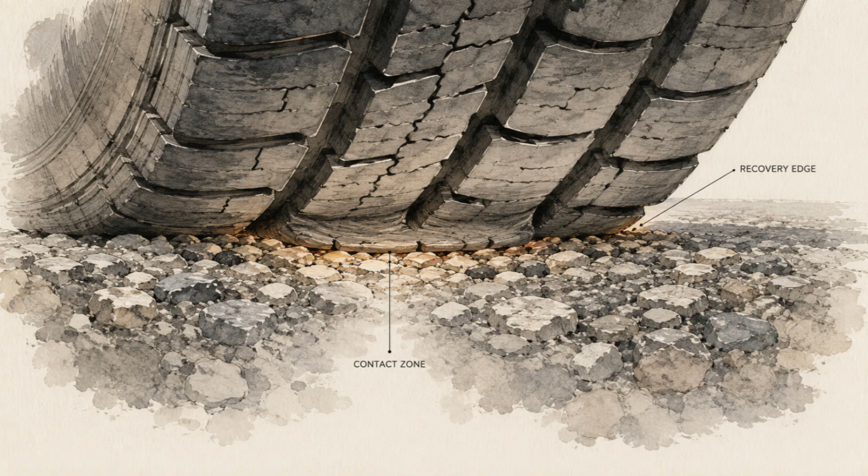A car slows for a pedestrian at a crosswalk. Beneath it, four patches of tire meet the road, together not much larger than a few open hands. In that brief stop, each patch must flatten, grip, warm, and recover before the wheel turns again.

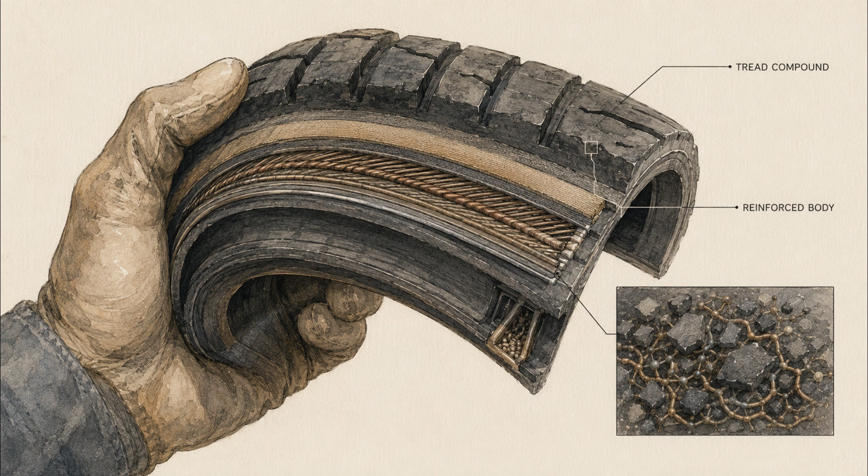The black surface looks solid and simple. It is neither. A tread block contains long molecules, reinforcing particles, protective chemicals, and carefully controlled links. Beneath it sit other rubber compounds, steel, textile, and trapped air. Each part carries a different piece of the same demand.

Rubber became civilization scale only when that recoverable material joined air, reinforcement, factories, roads, labor, and rules. The tire did not create modern mobility alone, but without a reliable place for machine and road to meet, speed, freight, and everyday travel would take a very different form.

That makes the contact patch personal. It shapes how your vehicle stops. Its condition depends on pressure, age, heat, and maintenance.

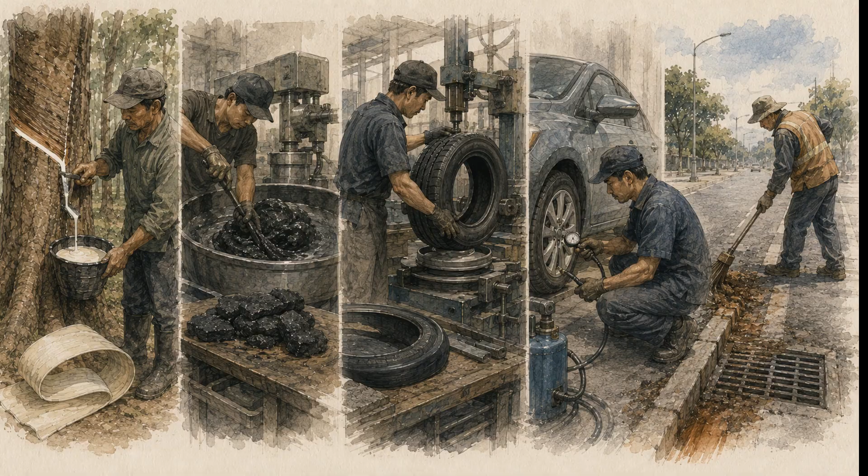People tap the latex, mix the compounds, build the tire, repair the road, and manage what wears away. Every trip depends on their work, and every trip leaves some material behind.

Rubber did not enter history as a European invention. Indigenous societies in the Americas had already collected latex and shaped elastic, water-resistant objects. They understood a living material drawn from plants long before European manufacturers tried to force it into shoes, cloth, hoses, and factory goods. The raw substance was remarkable.

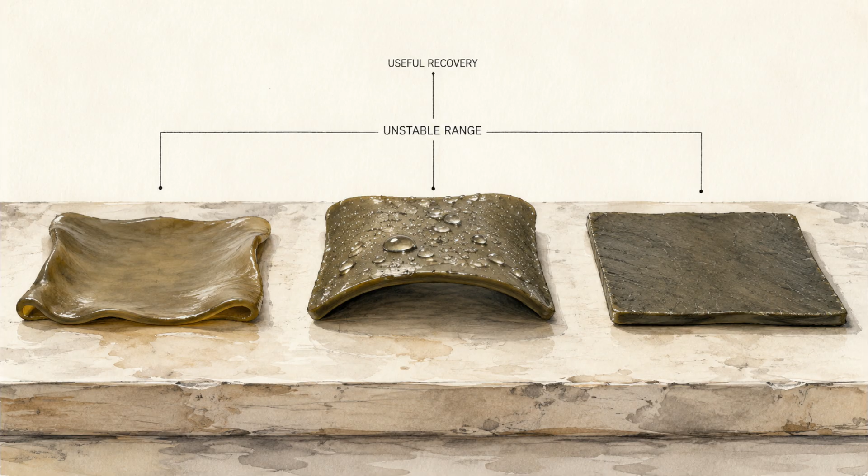Pull it, and it could stretch. Release it, and much of its shape returned. It resisted water. It could join flexible surfaces that leather, wood, and metal could not replace. Yet its behavior changed with heat, cold, time, and handling.

Early rubber goods could become sticky in warm weather. In cold conditions, they could stiffen. A useful shape might creep or distort. Manufacturers saw enormous promise, followed by spoiled products and angry customers. Elasticity was already there. Dependability was not.

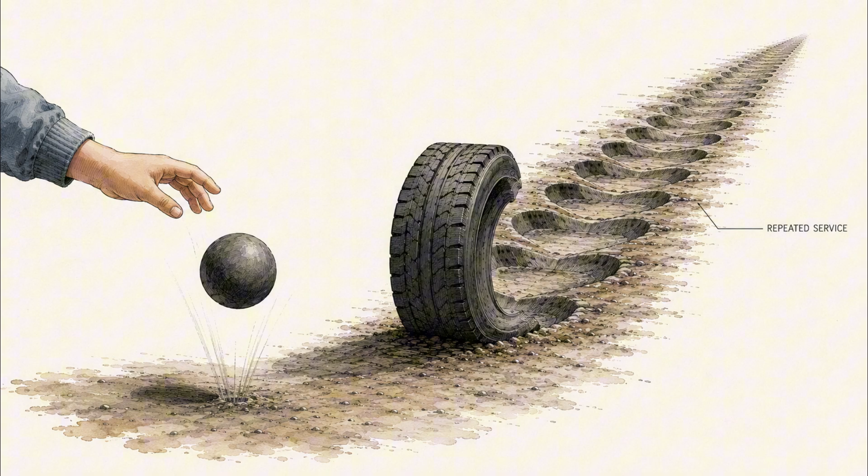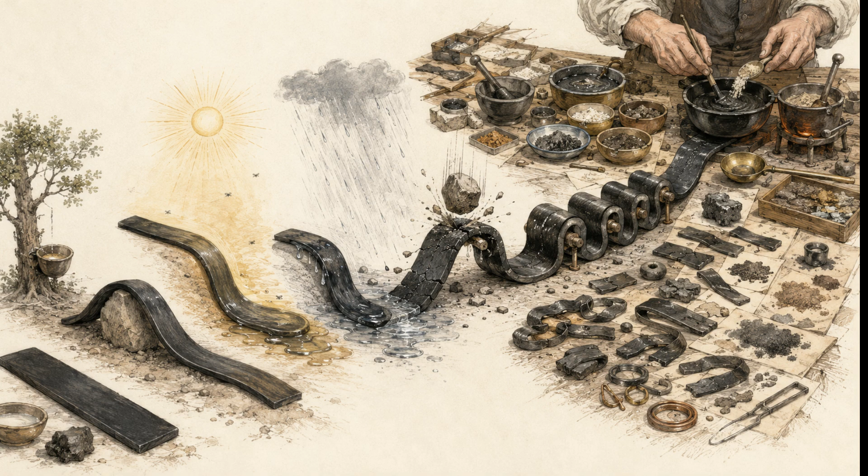That difference matters. A rubber ball can be a curiosity, while a tire must repeat the same demanding action for thousands of kilometers. It must bend without staying bent. It must hold together while warm. It must survive oxygen, sunlight, water, impacts, and constant flexing.

19th century experimenters spent years mixing rubber with powders, solvents, metals, heat, and sulfur. Charles Goodyear became the best-known name in the United States. Thomas Hancock developed and patented related work in Britain. The familiar story of one lucky accident hides a longer, contested process of experimentation.

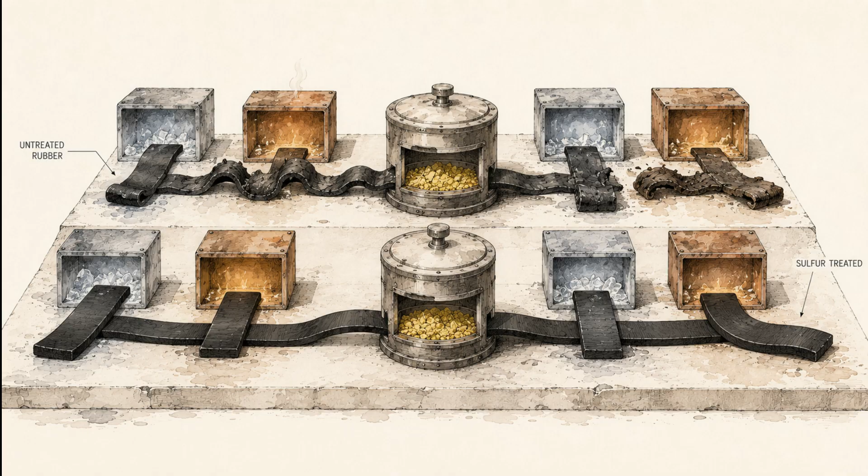Controlled heating with sulfur changed the industrial future of rubber. The treatment made useful properties more stable across a wider range of conditions. It did not create a perfect substance. It created a material that engineers could begin to formulate, shape, test, and reproduce.

Then another idea changed the job rubber was asked to do. Instead of placing a hard band around a wheel, designers enclosed air inside a flexible structure. By the 1890s, pneumatic bicycle tires were making rides smoother and faster. Cyclists wanted better roads, and the new tires soon moved from bicycles to automobiles.

The air carried load, but air alone was useless. It needed a flexible container that could survive bending and stay attached to the wheel. Rubber had become stable enough to serve that system. The next challenge was making it strong, consistent, and durable enough for machines moving farther and faster.

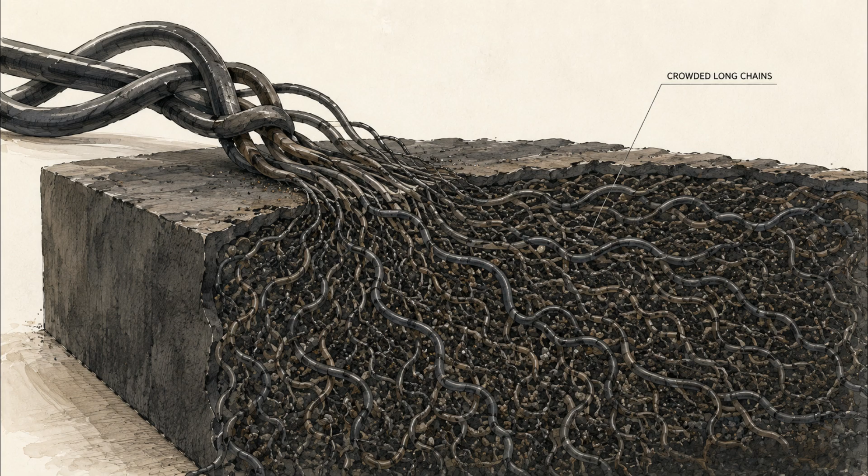To understand that change, imagine a bowl of very long, cooked noodles. They twist around one another, and they can change shape in countless ways. Natural rubber begins with a similarly tangled population of long molecules, although the real network is far smaller and more crowded. Polyisoprene is the long chain molecule that makes up most natural rubber.

When the material stretches, many chain sections become more aligned. When the force disappears, thermal motion helps the chains return toward a larger range of tangled arrangements. That is the basic source of rubber's spring-like recovery.

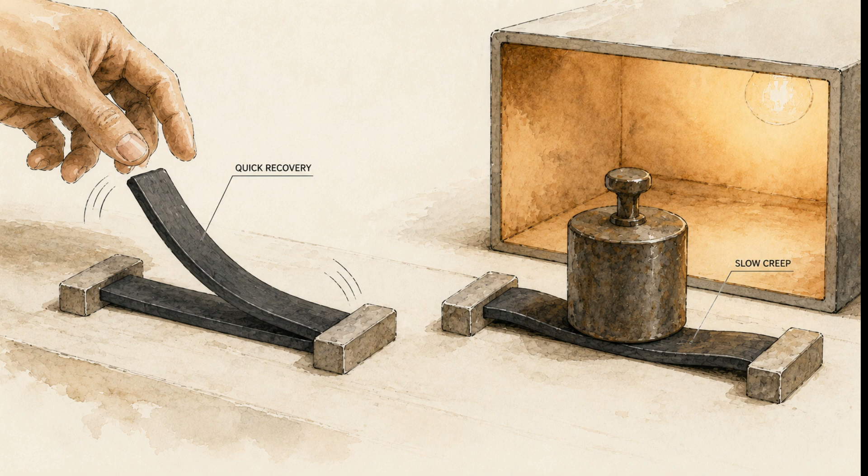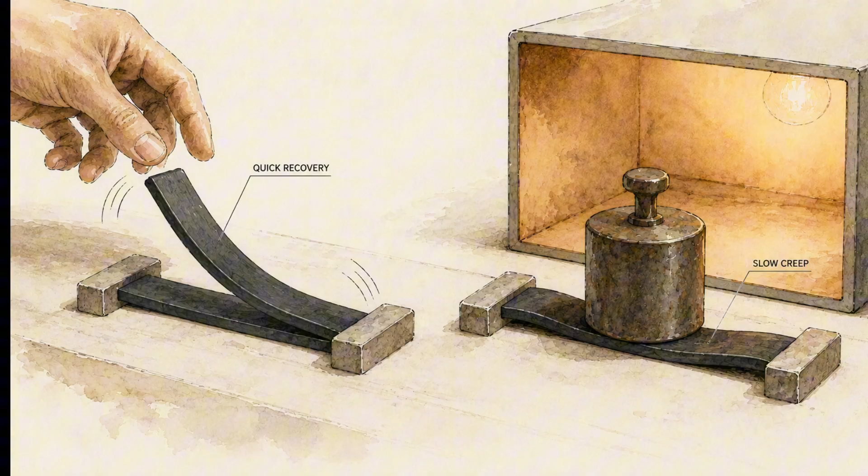But loose chains can slowly move past one another. Given heat, force, and time, the material can flow or keep part of a new shape. A useful tire compound needs the chains to move locally without escaping the whole network.

A crosslink is a connection that keeps neighboring chains in one network. Sulfur-based curing creates many such connections. They are not identical staples placed at even intervals.

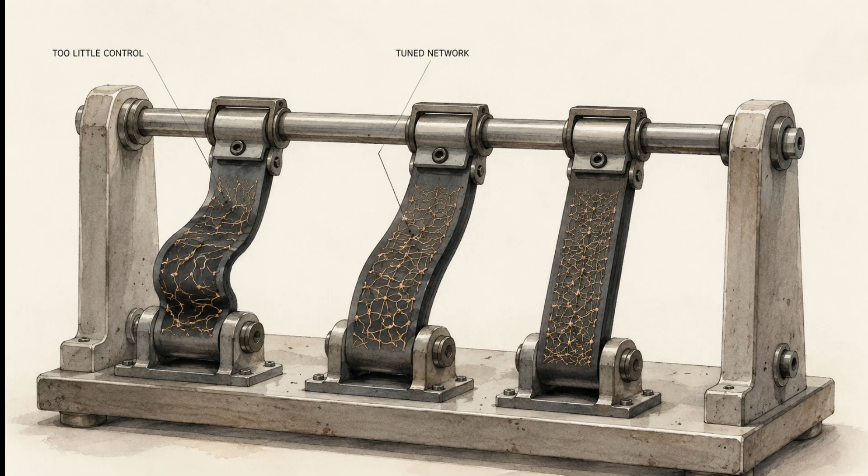Real networks contain several link structures, loops, loose ends, entanglements, and regions shaped by mixing and cure history. With too little control, the material can remain weak or unstable. Change the network, and stiffness, heat resistance, fatigue, and aging also change. Tire makers are not seeking the largest possible number of links.

They are tuning how far different compounds can move and how reliably they return. Natural rubber has another useful response under strong stretch, called strain-induced crystallization. It means stretched chain segments briefly form small ordered regions.

Those regions help the material resist further deformation, then largely disappear when the load is removed. This does not turn a rolling tire into solid crystal. The response depends on temperature, formulation, speed, previous loading, and the shape of damage. It helps explain why natural rubber remains valuable in demanding, fatigue-sensitive uses. It does not make cracks or poor maintenance harmless.

The polymer network is still only part of a tread compound. Fine carbon black aggregates can reinforce rubber by creating an enormous, complicated interface with the chains. They change stiffness, strength, wear, processing, and resistance to sunlight. Modern compounds may also use silica and specialized linking chemistry. There is no single ingredient that produces every desired property.

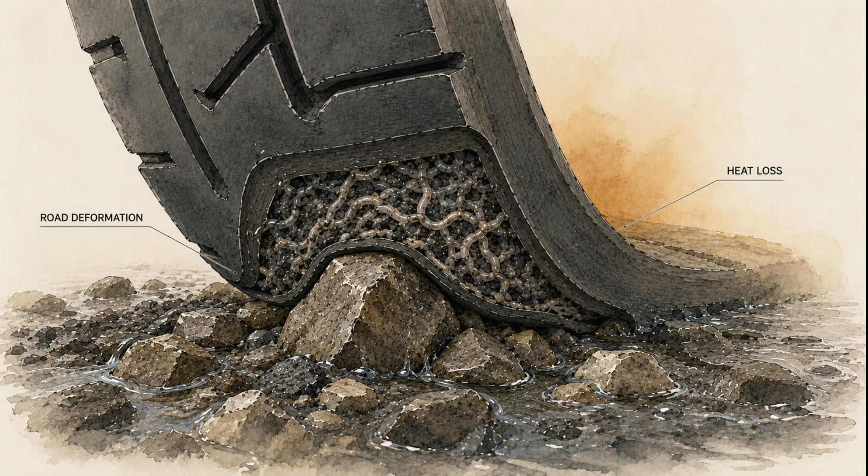Grip requires deformation at the road. That deformation also turns some motion into heat. Resistance to wear can conflict with traction under another condition. Cold, rain, load, speed, and pavement move the compromise again.

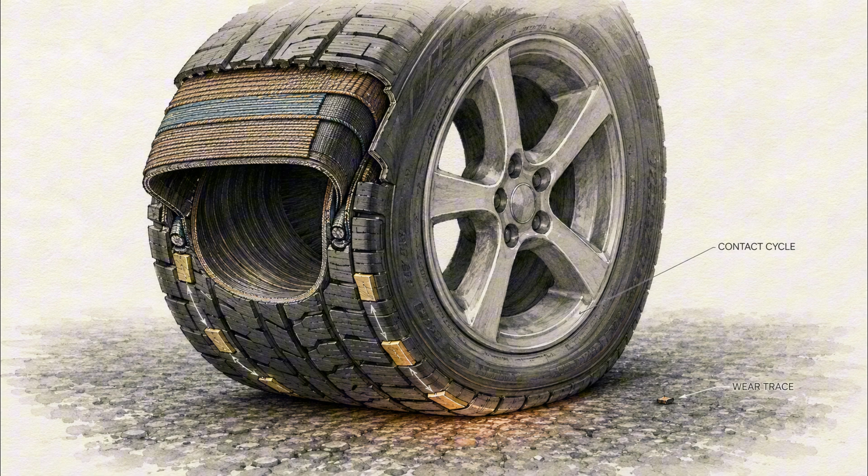So the contact patch is not a passive footprint. Tread blocks enter, bend, press against texture, and leave. The carcass changes shape around them. Some energy returns to the moving vehicle. Some becomes heat. Some material separates as wear. Recovery must begin before the same region comes around again.

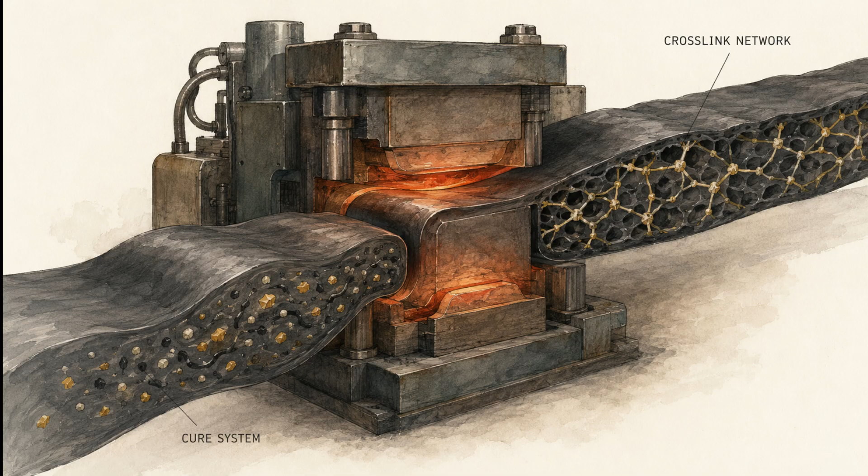The process that stabilizes rubber is called vulcanization. In simple terms, heat and a cure system builds the cross-linked network. In practice, sulfur may form different kinds of links, while accelerators and activators control how the reaction proceeds. The useful result depends on formulation, temperature, pressure, and time.

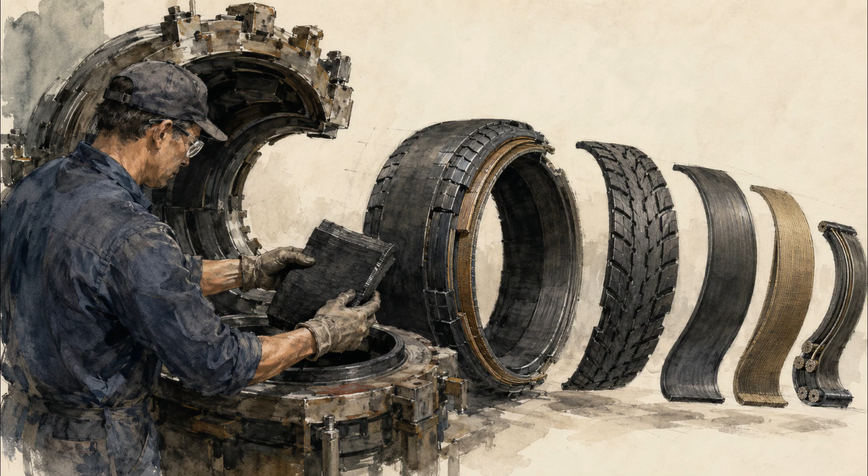Vulcanization solved one problem, then revealed many others. Pure cured rubber could not meet every demand of a modern tire. A tread needs abrasion resistance and grip. A sidewall must flex and weather. An inner liner must slow air loss. The bead must transfer force where tire meets rim.

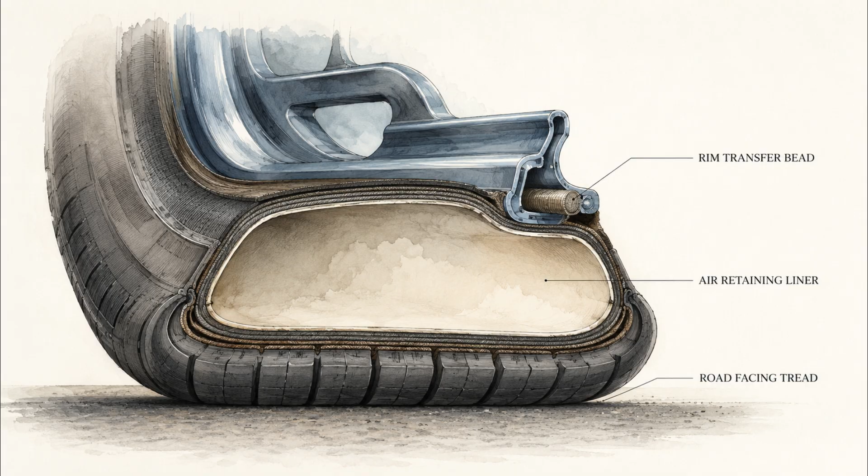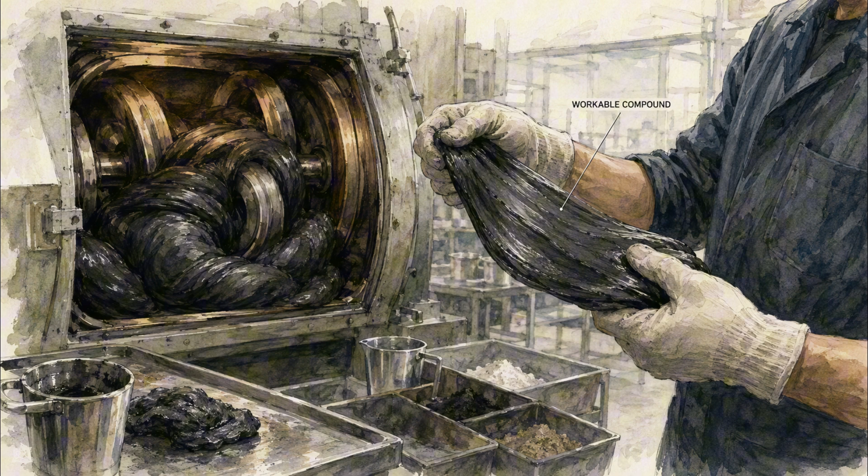That is why a tire factory does not begin with one black recipe. Workers and machines prepare separate compounds for separate jobs. Natural and synthetic rubbers may be blended. Fillers, oils, protective chemicals, and cure ingredients are mixed under carefully managed heat and mechanical force. Timing matters because the material must remain workable before final cure.

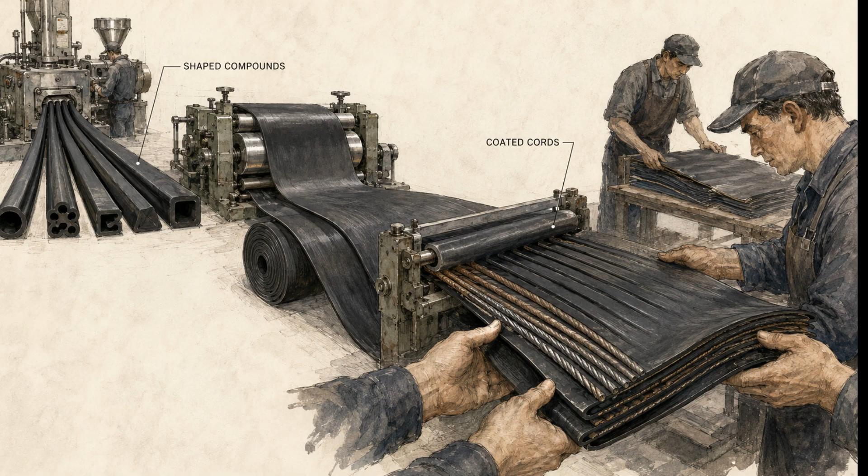Compounds are extruded or rolled into tread, sidewall, liner, and thin bonding layers. Rubber is also pressed around textile cords or steel. Each operation creates an intermediate part that another operation must place accurately.

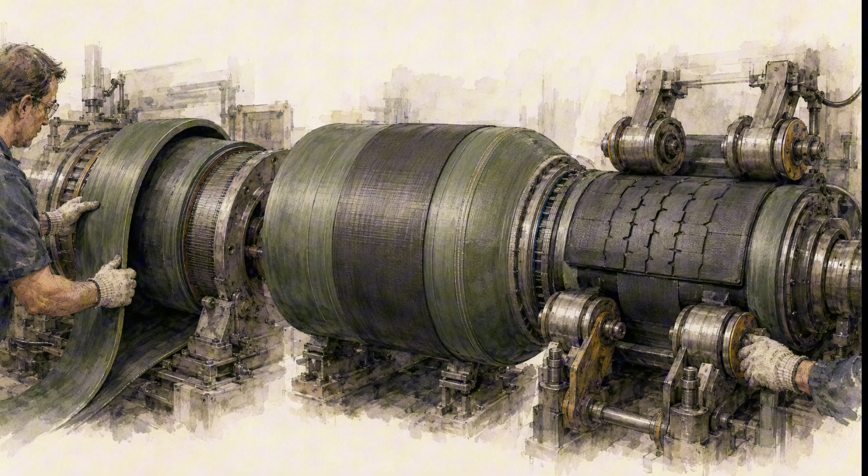On a building drum, the tire starts as an uncured assembly called a green tire. An inner liner goes down first in a common radial design. Carcass plies extend towards strong bead bundles. Sidewalls are added. Steel belts, optional cap plies, and the tread form a second assembly around the crown.

The body expands into the belt and tread. Rollers press the components together. Their uncured tack helps them stay positioned, but the structure is not finished.

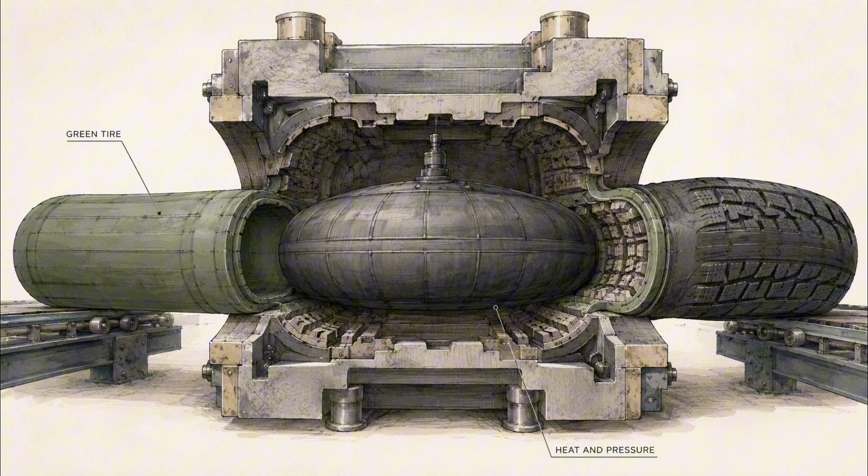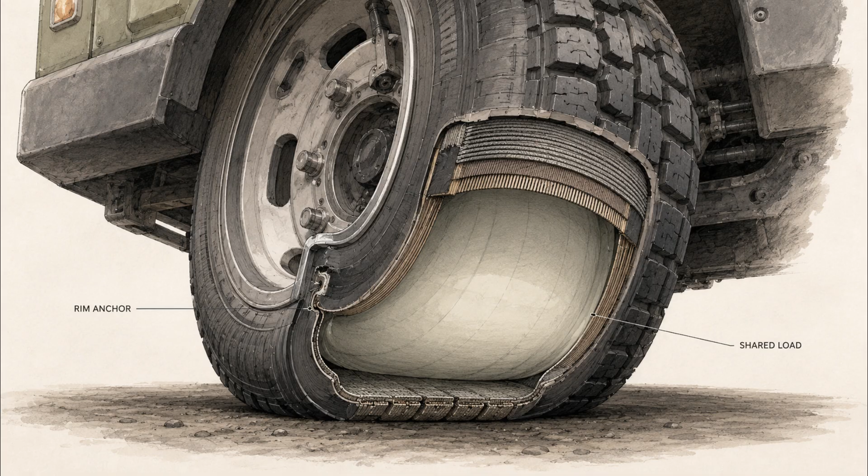A bladder then pushes the green tire into a heated mold. Pressure shapes the object while the compounds cure and bond. What leaves the mold is not a rubber ring. It is a pressure-containing composite designed to deform in controlled ways. Air pressure, carcass tension, belt geometry, beads, and several compounds share the load. The visible tread is only the road-facing edge of that system.

The historical path was just as layered. Sulfur treatment made rubber goods more dependable. Pneumatic bicycle tires showed what air and flexible material could do together. Better fillers, cords, compounds, radial structures, factory control, testing, and road design extended that performance.

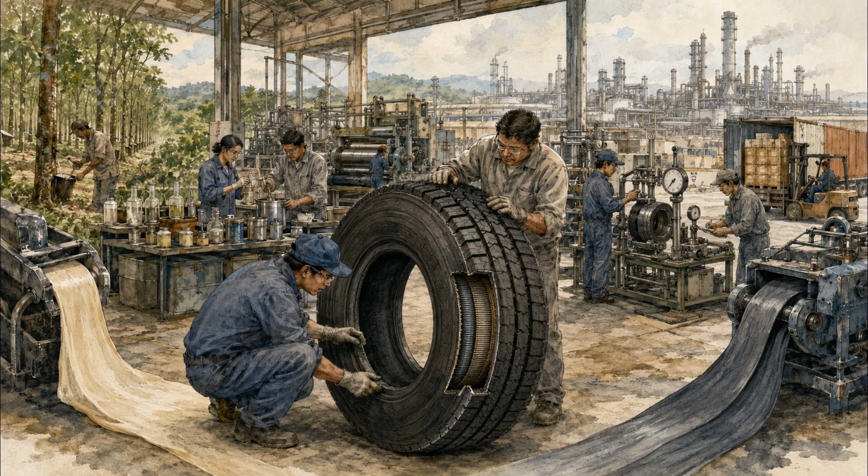No single workshop produced the modern tire in one leap. The breakthrough was the growing ability to divide conflicting jobs among materials and reunite them in one repeatable object. That required chemistry, skilled hands, machines, standards, and a supply chain reaching far beyond the factory wall.

For a cyclist on a rough 19th-century street, the change was physical. Air-filled tires softened repeated shocks and made faster travel more tolerable. Their popularity helped widen the bicycle market. Cyclists also became advocates for smoother roads, creating pressure that later motorists inherited.

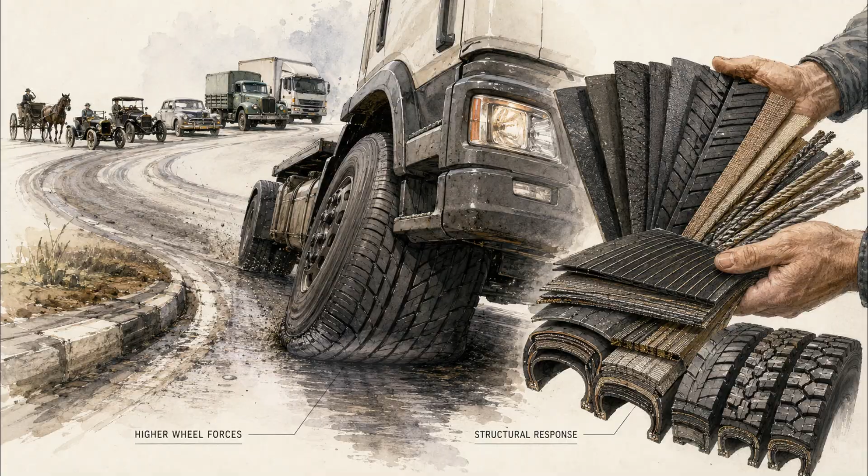Automobiles asked far more of the same basic idea. Vehicles became heavier and faster. Engines delivered more power. Brakes and steering placed new forces through the contact patch. Tire makers responded with new compounds, cords, belt structures, tread patterns, and methods for making them consistently.

Reliable tires relaxed a constraint on where machines could travel. Trucks were not tied to rails. Buses could follow changing routes. Farm machines entered fields. Emergency vehicles, construction equipment, and aircraft all depended on specialized versions of the flexible road interface.

But rubber did not build this world by itself. Steel made vehicles and reinforcement. Petroleum supplied fuel and synthetic polymers. Factories reduced cost. Credit expanded purchasing. Governments paved roads, wrote traffic rules, and chose where infrastructure would go. Maintenance networks kept vehicles moving.

As demand grew, the material connected distant landscapes. Rubber trees originated in the Amazon, where wild extraction fed an international boom. Production later shifted toward cultivated trees in Southeast Asia. Colonial institutions, plantation capital, botanical transfer, disease management, trade, and smallholder farming reshaped supply.

That history cannot be reduced to trees replacing trees. Natural forest, monoculture plantation, and mixed agroforestry are different systems. Nor did every producer share one experience. Plantation workers, independent smallholders, managers, states, and traders faced different risks and held very different power.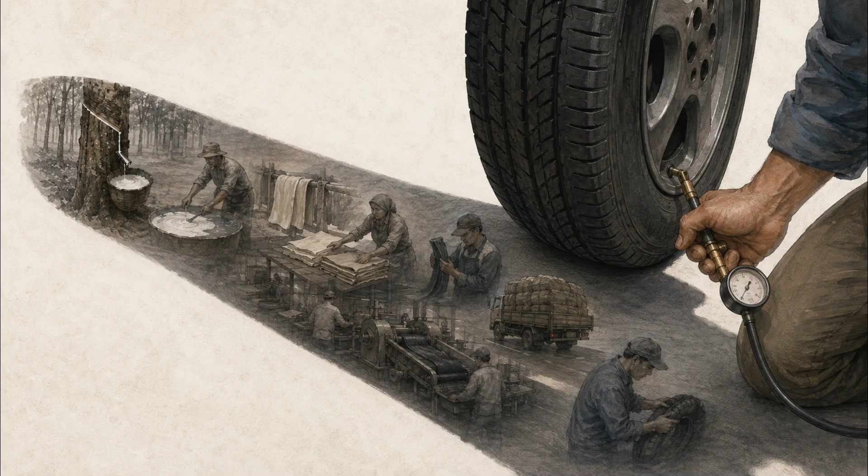The material then passes through collection and processing before it can become consistent industrial feedstock. That distance hides labor from the driver. A person checking tire pressure sees a finished black surface, not the tree—cut, cup, coagulation, grading, shipping, mixing, and inspection behind it.

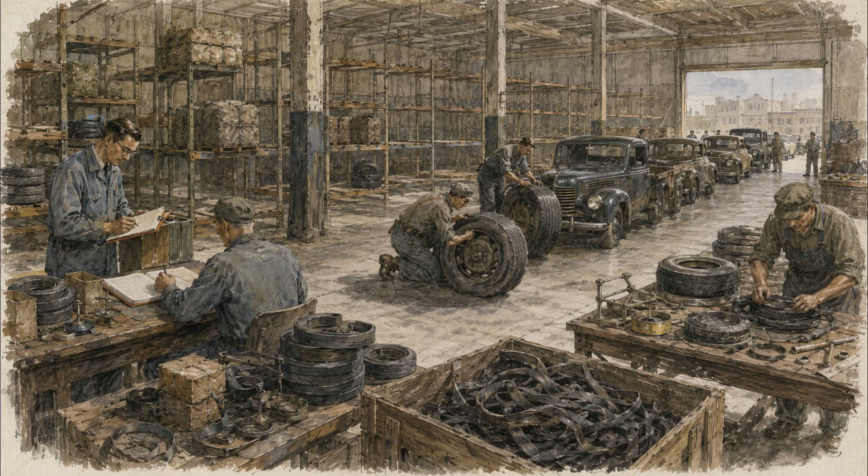Global dependence became impossible to ignore during World War II. When the United States lost access to most Southeast Asian supply, rubber was rationed and conserved. Government, universities, oil companies, and tire makers shared patents and built a vast program around general-purpose synthetic rubber. Factories scaled with remarkable speed, but substitution had limits.

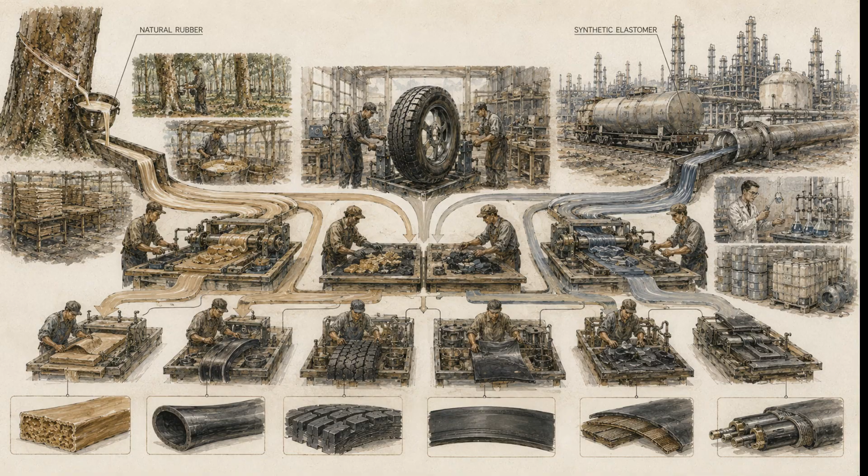Synthetic rubber changed the industry permanently without erasing natural rubber. Different polymers offered different advantages. Tire makers learned to blend them and assign them to particular regions instead of waiting for one universal replacement. That mixed system remains with us.

Natural rubber is still strategically important in demanding applications, while synthetic elastomers connect mobility to petroleum. Geographic concentration makes weather, disease, land policy, labor, shipping, and geopolitics part of what appears to be an ordinary tire purchase. The result is a civilization-scale dependency built around replacement.

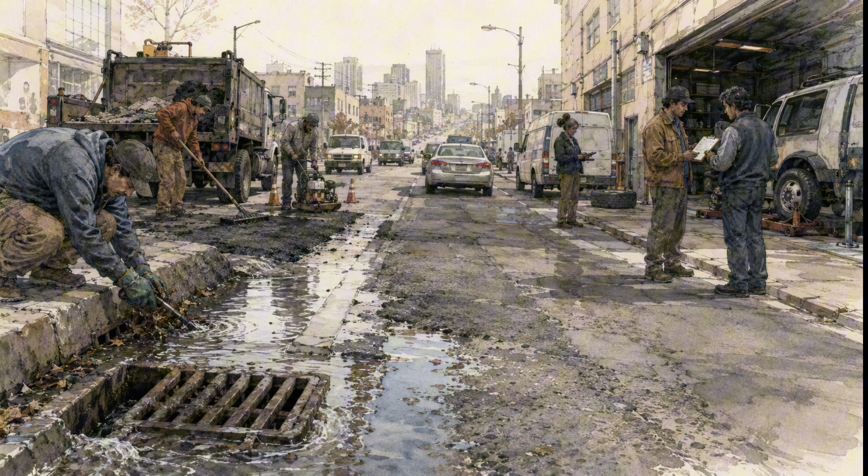Tread wears, tires age, casings fail inspection, fleets plan downtime, shops maintain pressure and alignment. Road agencies manage surfaces and drainage. Mobility works because millions of people continually replace, repair, monitor, and govern the interface.

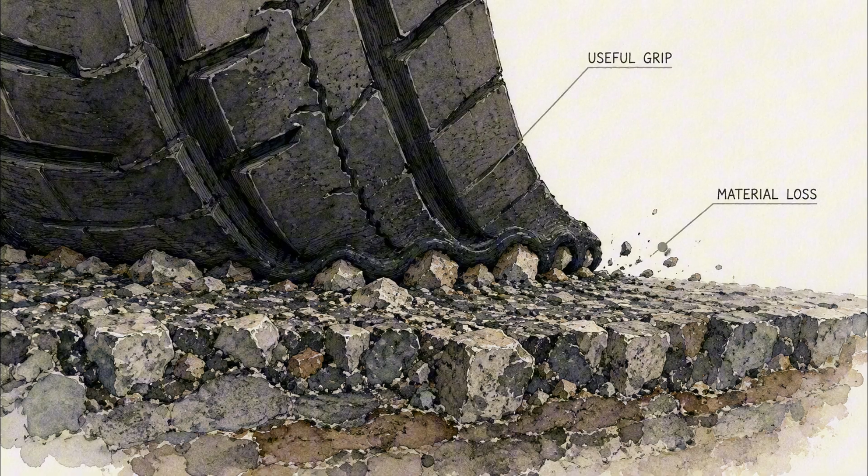Now, return to the contact patch. Grip exists because rubber and road deform against one another. That interaction cannot happen without friction. Over time, pieces of tread and pavement separate. The tire becomes lighter by an amount too small to notice after one trip, but the loss never truly disappears.

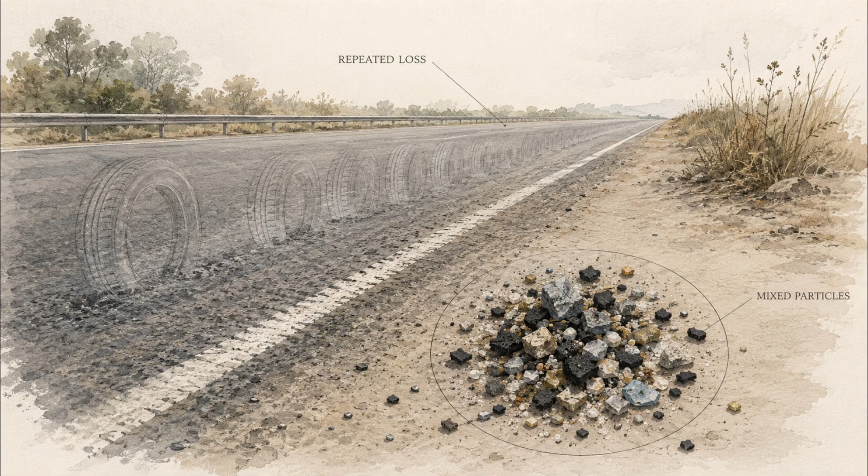Tire and road wear particles are not one clean powder. They contain polymer, filler, minerals from pavement, and many additives. Some remain near the road, some enter the air. Rain carries others into drains, soil, streams, and sediment. Their size, chemistry, and path continue changing after release.

Even measuring them is difficult. Black particles are hard to distinguish from soot and road material. Laboratory preparation can damage the rubber being counted. Estimates change with traffic, braking, speed, vehicle, tire, pavement, weather, and method. A dramatic global number can hide more than it explains.

The hazards also differ. Researchers have linked particular transformed tire chemicals to severe effects in sensitive fish. That evidence is important—it does not mean every particle has the same toxicity or follows the same route into every organism. Compound, dose, weathering, place, and exposure remain essential. The cost begins long before the road.

Most natural rubber grows in tropical regions, much of it in Southeast Asia. High-resolution satellite research has tied substantial forest loss there to rubber expansion. Yet a mixed smallholding, an old plantation, and newly cleared natural forest cannot share one environmental label. Livelihood and harm can occupy the same landscape.

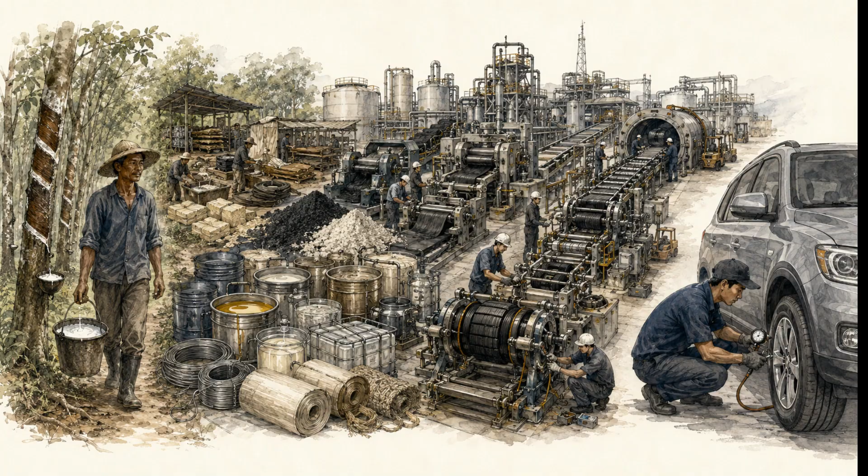Rubber supports many smallholders and workers. Plantation tasks also bring real safety and health concerns. The evidence differs by country and labor system, so there is no need to invent one tragic worker. A controlled tapping cut and a carried bucket already reveal skilled, repetitive labor.

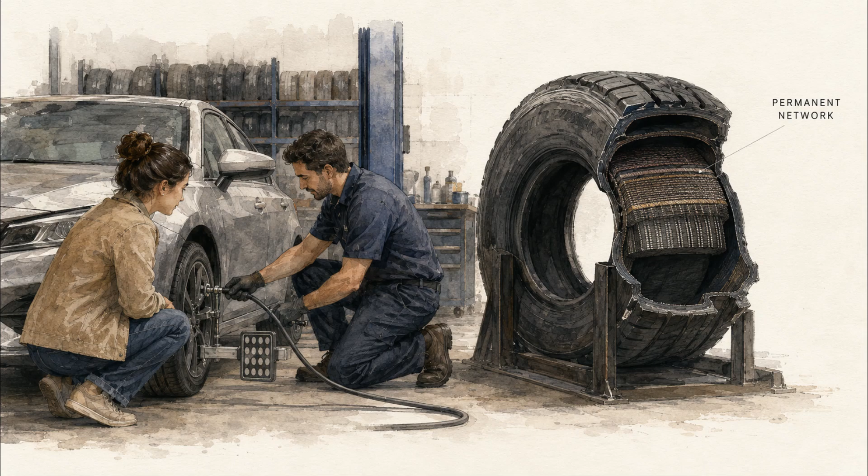Manufacturing extends the footprint through synthetic rubber, carbon black, silica, oils, chemicals, metals, textiles, energy, and industrial emissions. Tire life then depends on maintenance. Poor inflation and alignment can increase heat, wear, fuel use, and risk. The driver becomes part of the material system.

At the end, the network that made rubber dependable becomes a barrier. A cured tire cannot simply be melted and cast like clean metal. Crosslinks hold the polymer, while steel, textile, fillers, coatings, dirt, and several compounds resist separation.

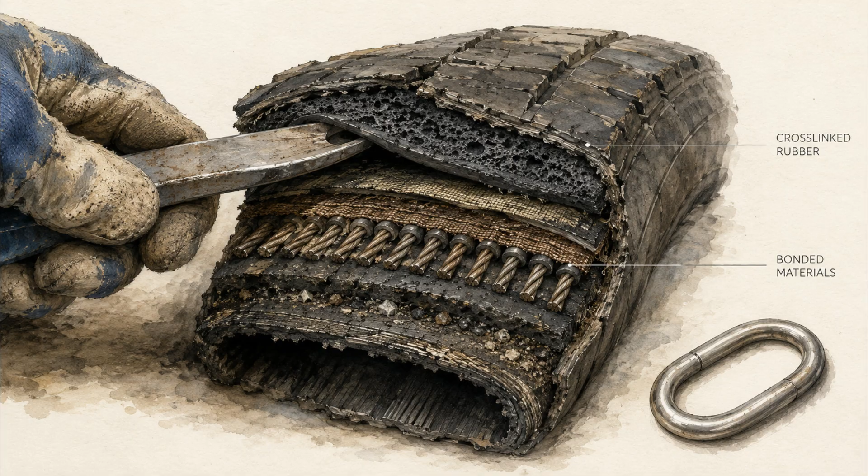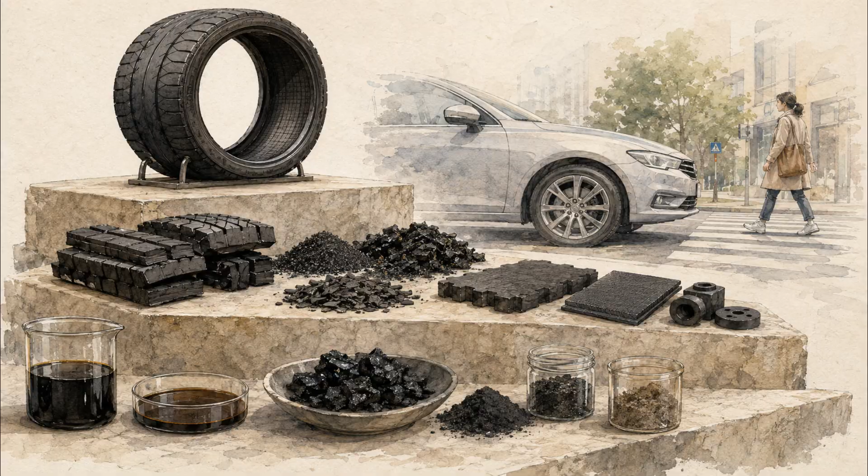Some sound casings can be retreaded, preserving far more of the original structure. Other tires become ground rubber, construction material, fuel, oil and char, or experimental recovered feedstock. Calling every route recycling erases how much function, energy, and material quality each one actually preserves.

The tire therefore carries a difficult bargain. It makes friction controllable enough to move and stop. That same friction spreads material through the environment. Its durable network survives repeated use. That same network prevents easy return to the form from which it began.

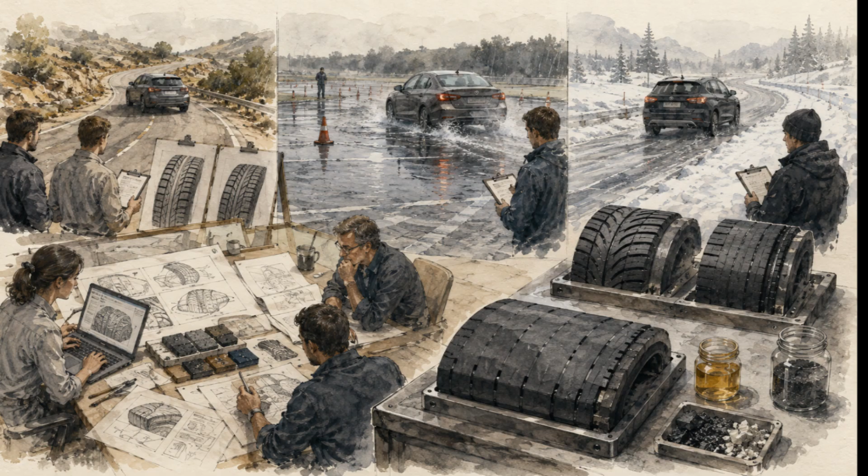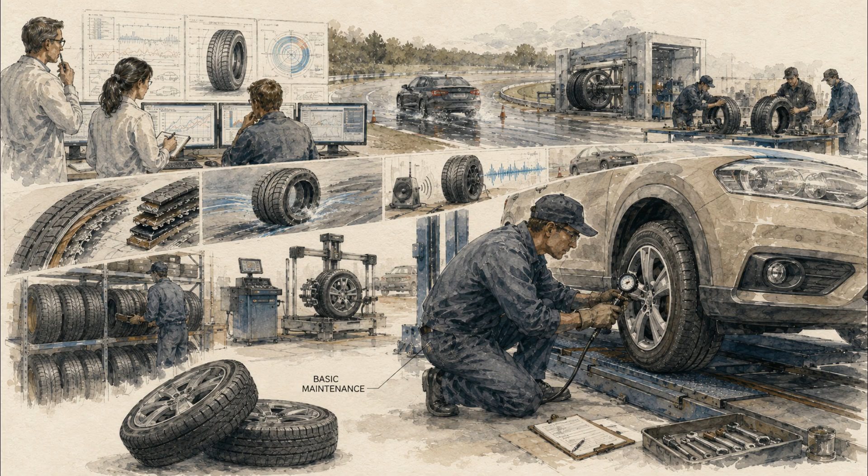There is no single green tire waiting to solve every part of that bargain. Longer life can reduce replacement, but a harder low-wear tread must still grip in rain and cold. Lower rolling resistance can save energy, but safety, durability, noise, and handling remain part of the same design.

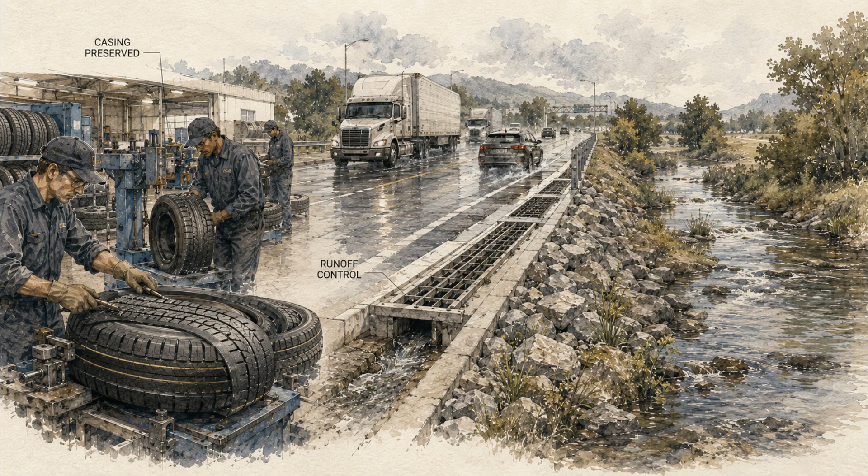The first improvements may be unglamorous. Correct pressure, alignment, rotation, inspection, and repair help tires do their intended work. Fleet retreading can preserve a qualified casing instead of discarding the whole composite. Road and stormwater design can reduce how much wear reaches sensitive waterways.

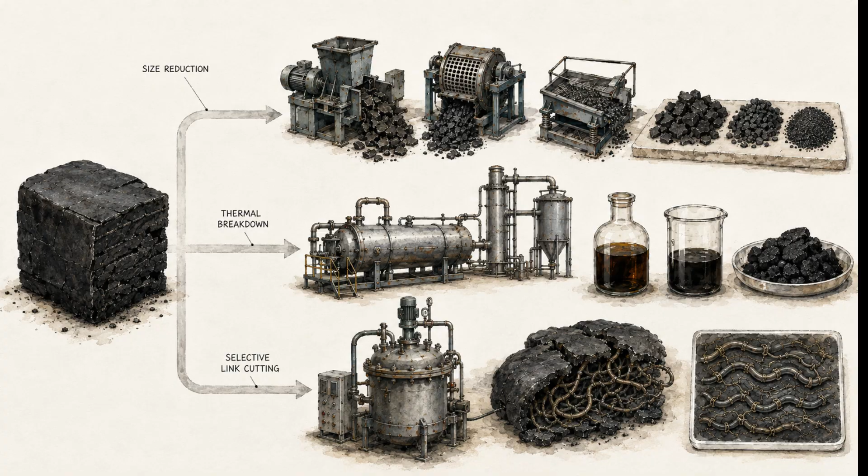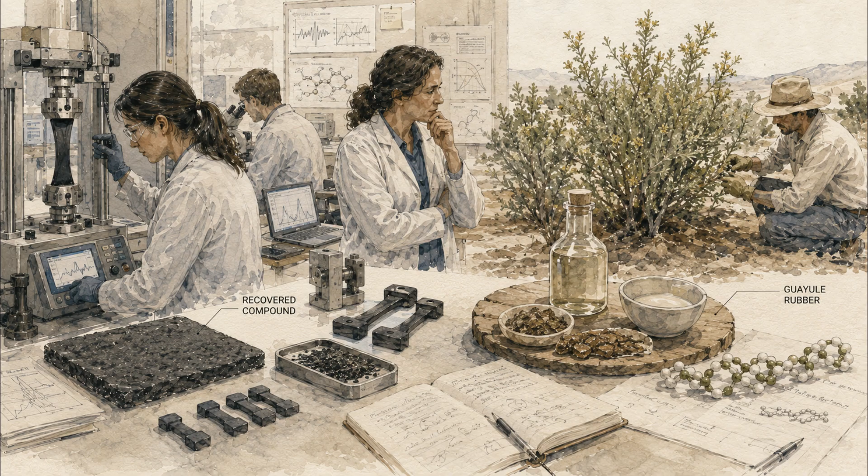Material recovery needs clearer language. Grinding changes size, not the cross-linked network. Pyrolysis breaks material into different outputs. Devulcanization tries to cut selected links while keeping more long chains intact. That selectivity is difficult, and recovered material must still prove consistent performance in a demanding new compound.

Researchers are also looking beyond one tree. Guayule, a desert shrub, can produce natural rubber with a similar polymer backbone. It may diversify supply and reduce dependence on one tropical crop. But demonstration tires do not settle farming yield, water, land, extraction, quality, cost, or industrial scale.

Plantation systems can change too. Better traceability can identify forest conversion. Agroforestry can mix rubber with other vegetation and incomes in some settings. Worker protections can improve tasks that remain essential. None of these steps makes every product harmless, and none works without institutions that reward the improvement.

The deeper opportunity is to stop asking one material to carry the whole solution. Tire makers can change compounds and construction. Vehicle designers can reduce unnecessary mass. Drivers and fleets can maintain pressure. Cities can manage runoff. Producers can protect forests and workers. Recovery systems can preserve the highest useful function available.

The pedestrian reaches the other side. The brake releases, and the interrupted wheel completes its turn. The contact patch lifts from the road. Its rubber network recovers, carrying most of its shape forward and leaving an almost invisible trace behind.

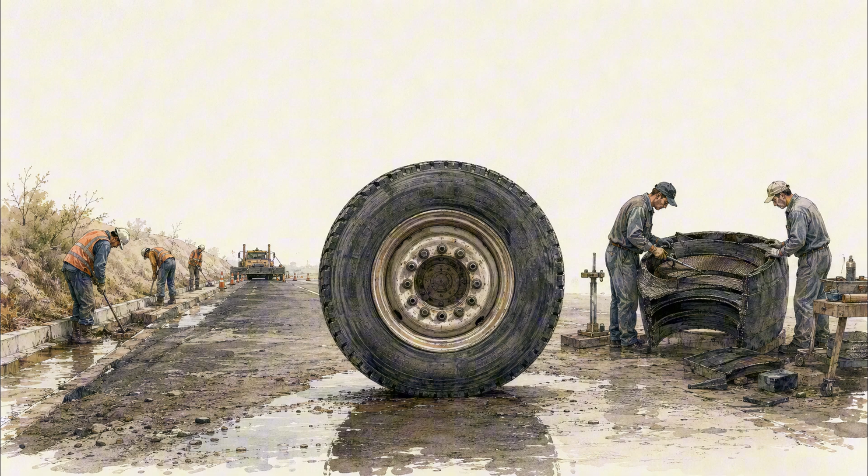Inside that motion is a tropical tree, a careful cut. Tangled chains, sulfur links, reinforcing particles, tire builders, steel cords, and trapped air. It also carries paved roads, maintenance decisions, and a waste system still struggling to reverse what curing made permanent.

Rubber did not put the world on wheels by itself. It gave wheels a recoverable meeting place with an imperfect surface. Human systems scaled that ability, distributed its benefits, and displaced its costs.

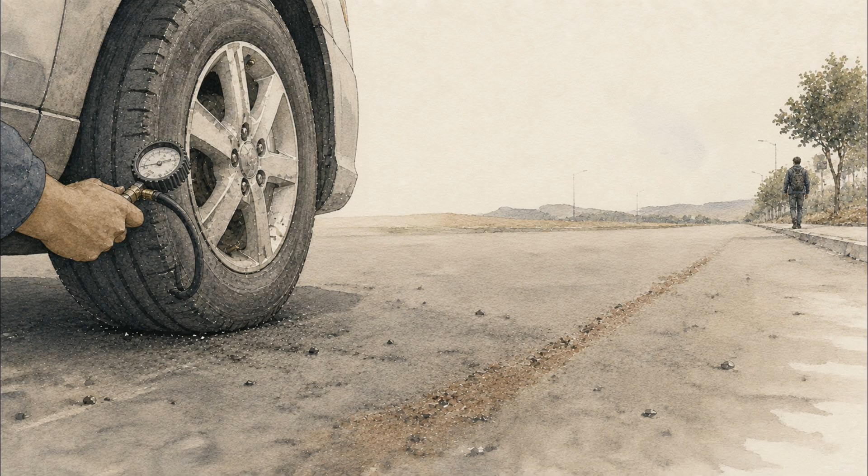Once the contact patch becomes visible, mobility looks different. It is no longer a machine floating over the road. It is a repeated material negotiation between grip and loss, durability and recovery, distance and responsibility. How carefully are we willing to manage that meeting place?